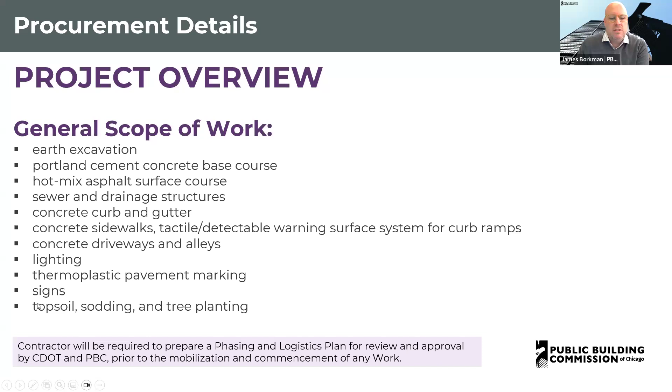The contractors are required for this project to prepare a phasing and logistics plan for review and approval by CDOT and PBC prior to the mobilization and commencement of any of the work here.

We also have some time of completion requirements that are included in the instructions to bidders. Those requirements will be highlighted here briefly, and after that I'll turn it over to Randy or Robert if they want to go into more detail. Right now, the substantial completion date is September 30th, 2025, with the following scheduled milestones.

First is mobilization - that's pre-construction, permitting, submittals of materials and equipment. Work cannot commence sooner than December 10th of this year, and must wrap up by March 31st of 2025.

Schedule 2 is the substantial completion, which involves the actual street reconstruction and all associated work. That work is not to commence sooner than April 1st, 2025, and must be completed by the substantial completion date of September 30th, 2025. Scheduled milestone number 2 is the tree planting - the fall tree planting schedule, starting no sooner than October 1st, 2025, and wrapping up by November 30th of 2025.

Liquidated damages for this project are $1,000 per day to achieve substantial completion, and $500 per day for each scheduled milestone date. Randy or Robert, anything you'd like to add here for time of completion requirements?

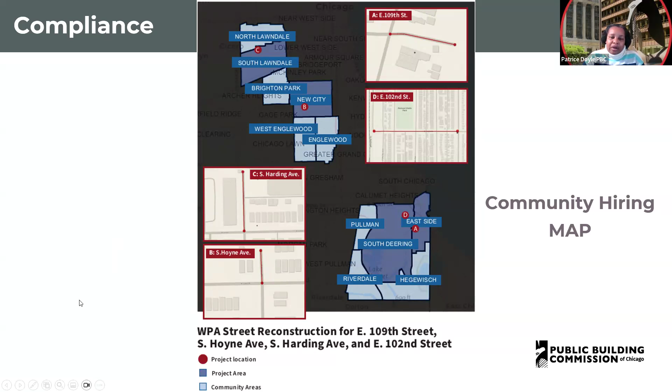B2G is our MBE/WBE tracking system that we use to monitor payments for MBEs and WBEs. Your MBE and WBE credit, if they are an established business meaning they are in the process of graduating from the program, their certification will identify what percentage they are at.

First year is 75%, second year is 50%, and third year is 25%. After that, hopefully they'll graduate from the program. So make sure when you identify an established MBE or WBE firm, that's the amount of credit they will receive, not their contract amount, but the credit amount for MBE/WBE participation.

Manufacturers that are MBE and WBE firms receive 100% credit. Suppliers receive 60%, and brokers receive 0%.

So if you have an MBE that's an established business with a contract value of 100,000, and they're in their first year, only 75,000 should appear in the credit amount on the Schedule D. Again, this is to be completed by the company bidding on the project.

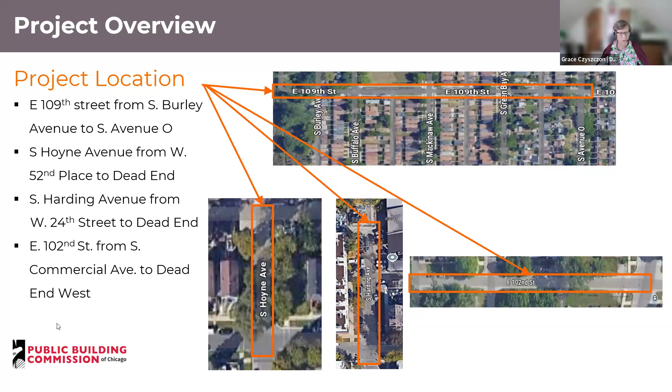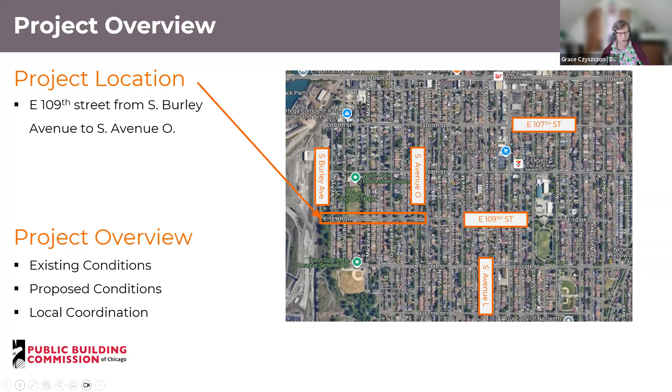East 109th Street from South Burley Avenue to South Avenue O. We'll discuss existing condition, proposed conditions, and some local coordination.

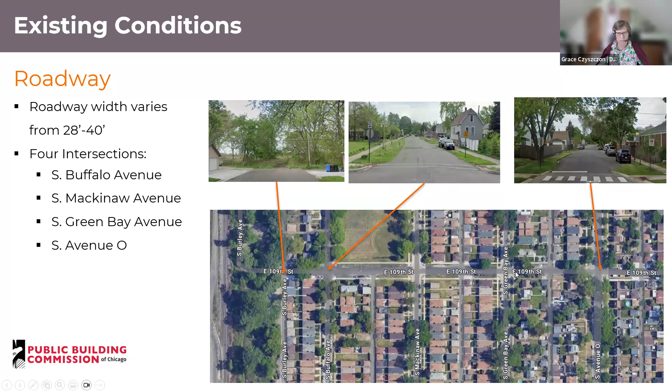Existing condition: existing roadway pavement width varies from 28 to 40 feet. This project includes 4 intersections: South Buffalo Avenue, South Mackinaw Avenue, South Green Bay Avenue, and South Avenue O. In the pictures above, there are some locations of pictures of those intersections.

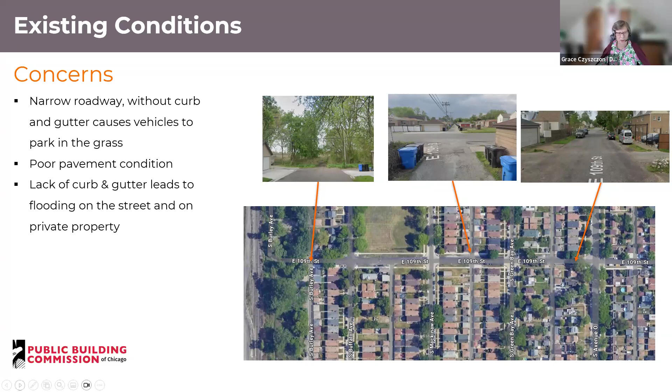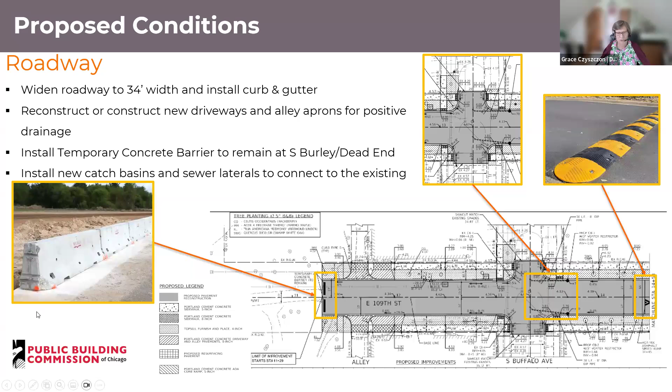Proposed conditions. We are proposing to widen the roadway to 34 feet width and install curb and gutter. Reconstruct and construct new driveways and alley aprons for positive drainage. Install temporary concrete barrier to remain at South Burley Avenue, which becomes a dead end. Install new catch basins and sewer laterals to connect to the existing sewer main.

This project includes one intersection to be resurfaced. That's South Avenue O and East 109th Street.

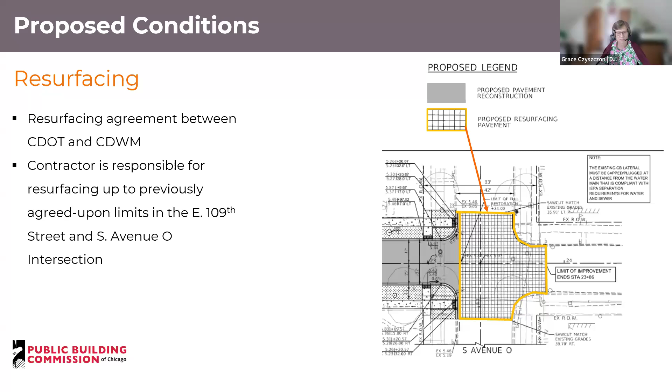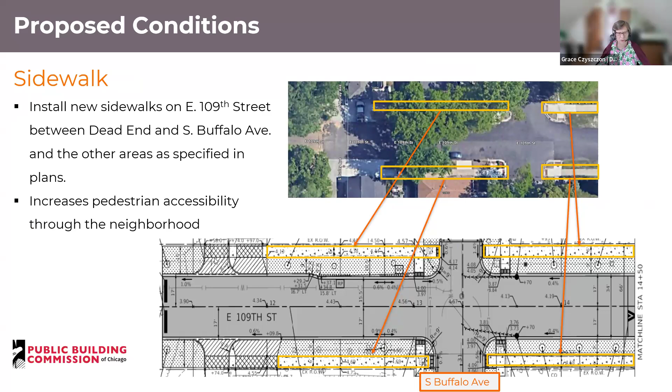Proposed conditions continued. Sidewalk. Proposed sidewalk is going to be installed from Dead End to South Buffalo Avenue, which will increase pedestrian accessibility throughout the neighborhood.

Next slide shows continuation of installation of a new sidewalk on both sides of the road, and that is from South Buffalo to South Mackinaw. Again, it increases pedestrian accessibility throughout the neighborhood.

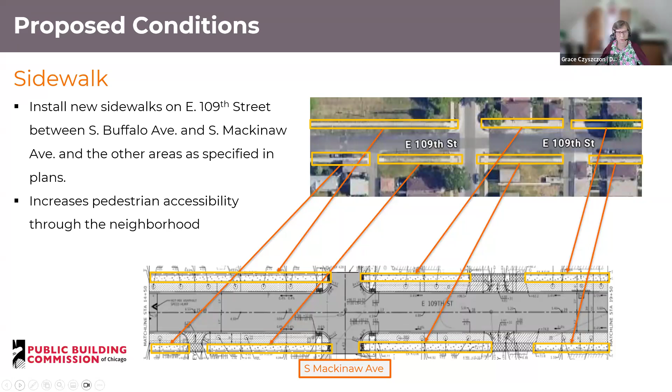Next slide shows continuation of installation of new sidewalks, which does provide ADA accessibility throughout the neighborhood.

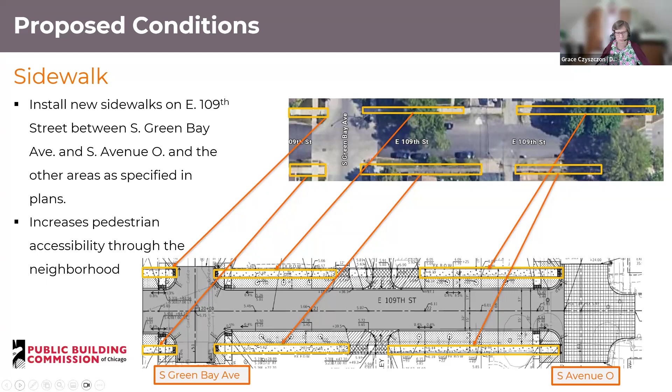Next slide shows that along with the roadway improvement, new trees will be installed. A total of 40 new trees will be planted between sidewalks and roadway, which is a common place for trees. New grass sod will be placed. Also, a few trees will be removed as shown on the plans per forestry survey and recommendation.

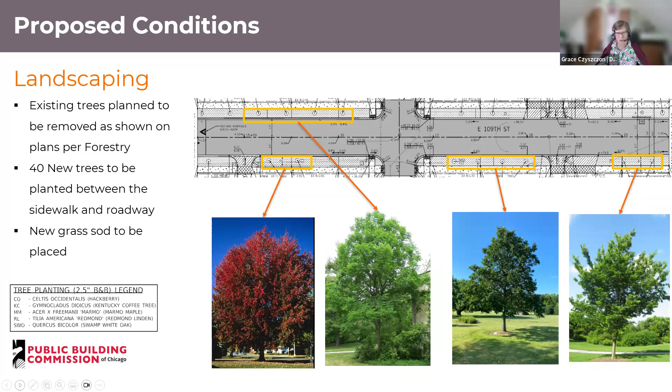Parking coordination: we are proposing to maintain existing parallel parking on 109th Street on both sides. Installing curb and gutter definitely defines where parking should end, not in the parkway area.

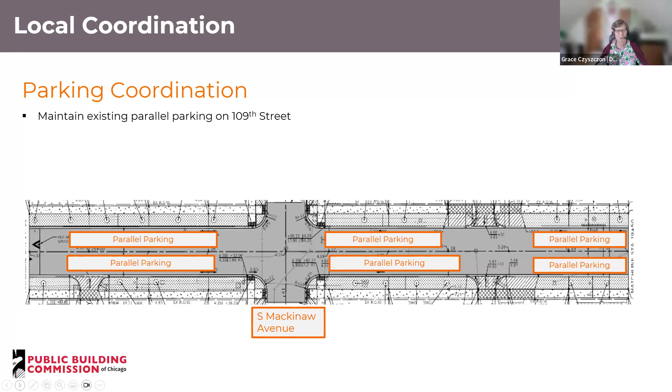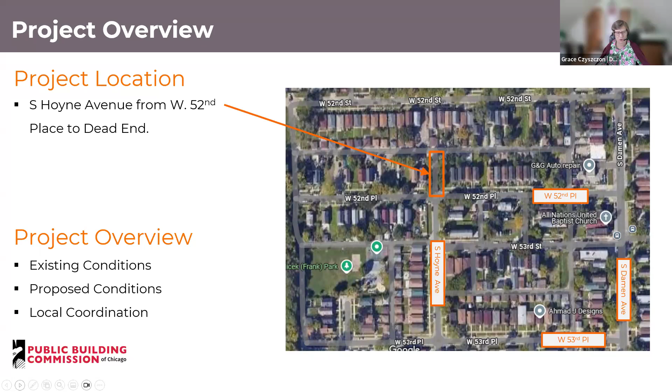Next location is South Hoyne Avenue from 52nd Place to Dead End. Again, we will be talking about existing condition and proposed conditions. Existing roadway width varies from 18 to 29 feet.

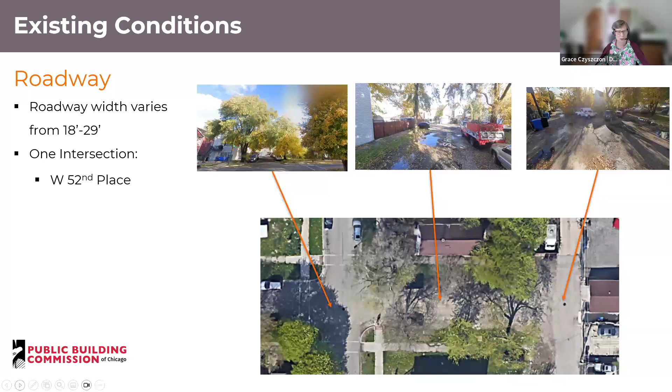This location is a short location, includes the 52nd Place intersection with South Hoyne Avenue. And pictures on the top are showing ponding, standing water, and poor pavement conditions.

Proposed conditions: we propose to widen the roadway to 30 feet wide and install new curb and gutter, reconstruct the driveway and apron of an alley, install new catch basins.

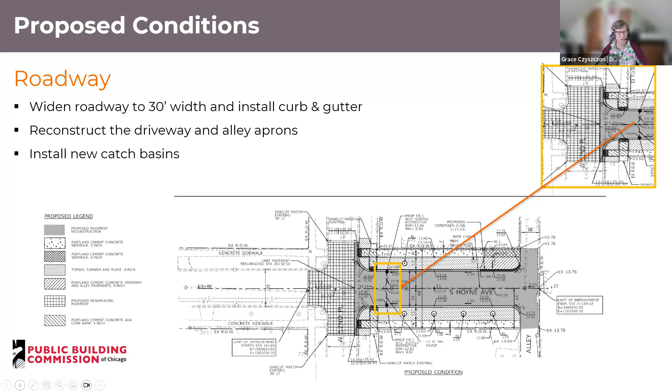This project includes one intersection to be resurfaced, which is 52nd Place and South Hoyne Avenue.

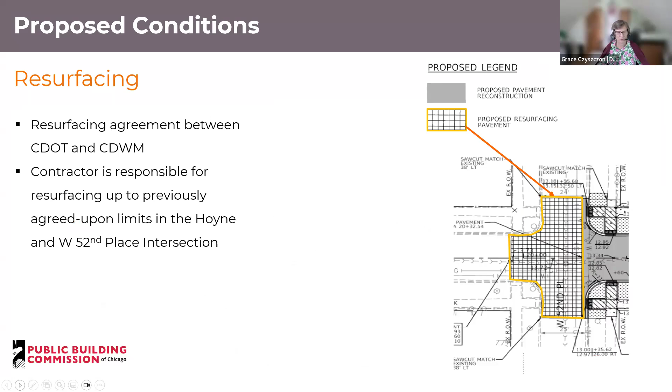New sidewalks will be installed on both sides of the roadway near the right-of-way, and new sidewalks will increase accessibility to the neighborhood and around. We will reconstruct pedestrian ramps at the intersection to meet ADA standards, place detectable warning tiles at each ADA ramp, and add new crosswalk pavement markings.

This project will also have new trees planted. There will be 5 of them, as shown on the plans and highlighted in this slide. New grass sod will be placed.

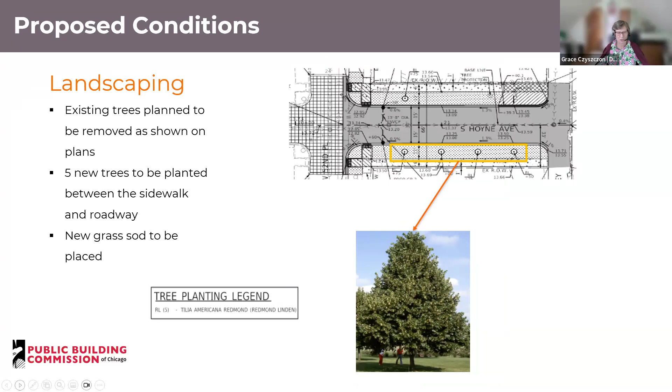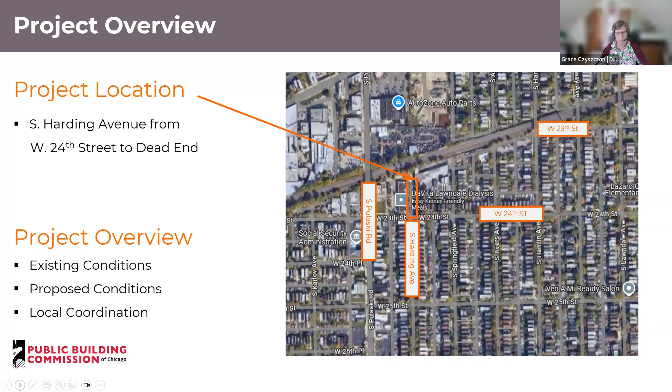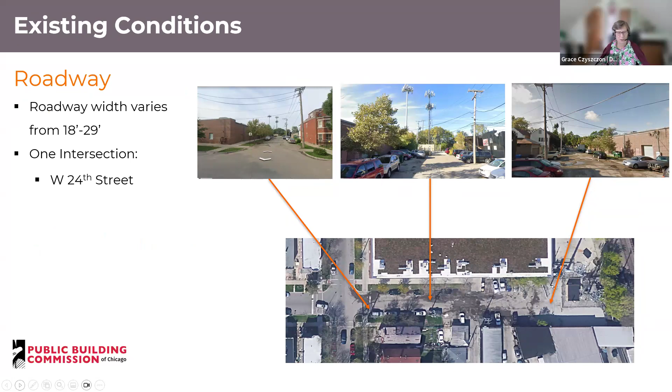Next location is South Harding Avenue from West 24th Street to Dead End. We'll talk about existing conditions and proposed conditions in the next slides. Existing roadway width varies from 18 to 29 feet. This project has one intersection, that is West 24th Street and South Harding Avenue.

Concerns: narrow roadway causes vehicles to park in the grass, as shown in the picture to the left. Poor pavement conditions, shown in the picture to the right. Lack of curb and gutter leads to flooding on the street and on an adjacent private property.

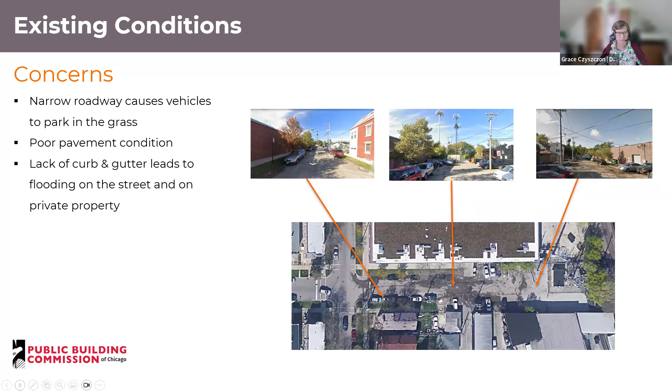Proposed conditions. This design proposes to widen the roadway to 32 feet and install new curb and gutter, reconstruct existing driveways and alley apron, and install new catch basin and sewer lateral to connect to the existing sewer main line.

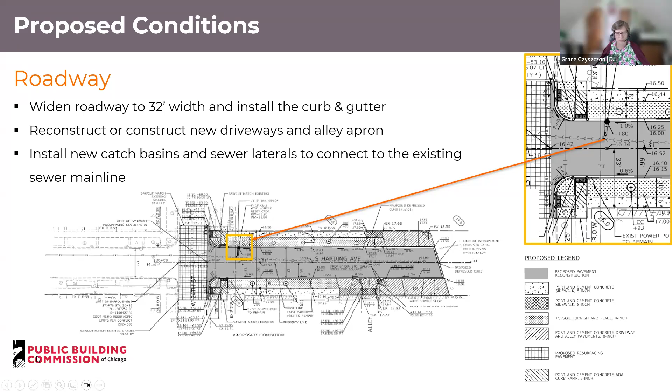This project also has one intersection to be resurfaced. That's West 24th Street and South Harding Avenue.

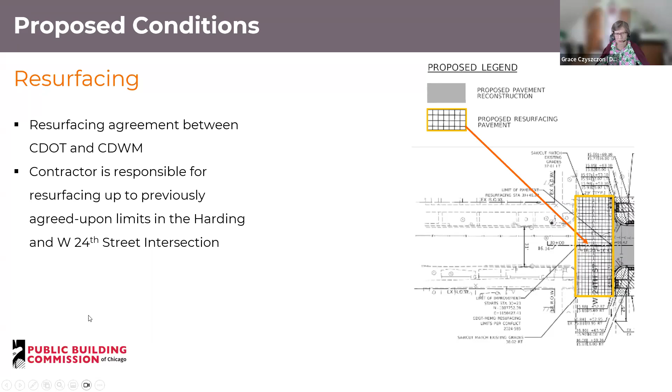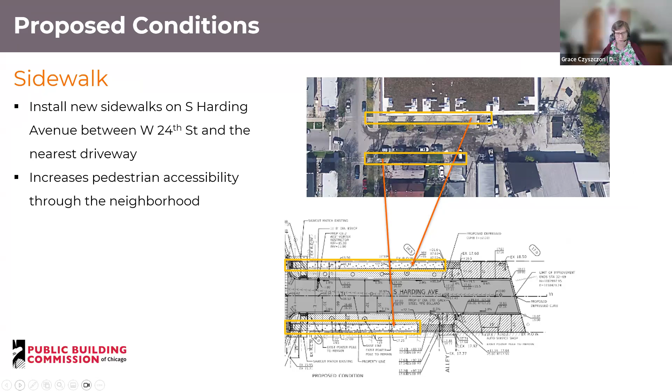Sidewalk will be installed on both sides of the roadway to the nearest driveway. This will increase pedestrian accessibility throughout the project and neighborhood.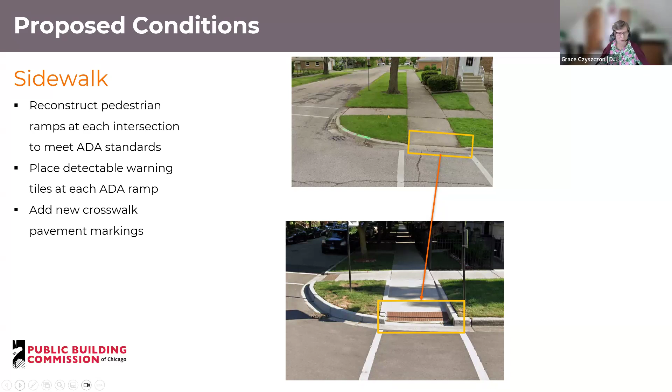It will need to reconstruct pedestrian ramps at each intersection to meet ADA standards, place detectable warning devices, tiles, and add new crosswalk pavement markings.

This project, as all above, is planning to have new trees planted. There will be 3 new trees installed. Grass, sod will be placed in the parkway.

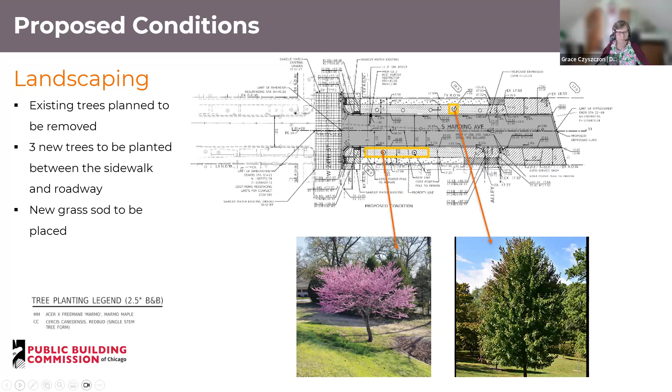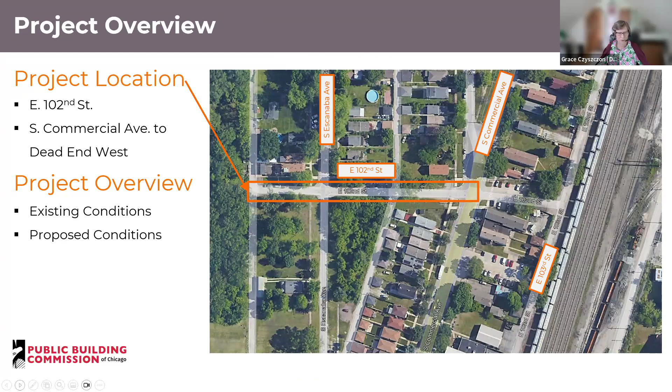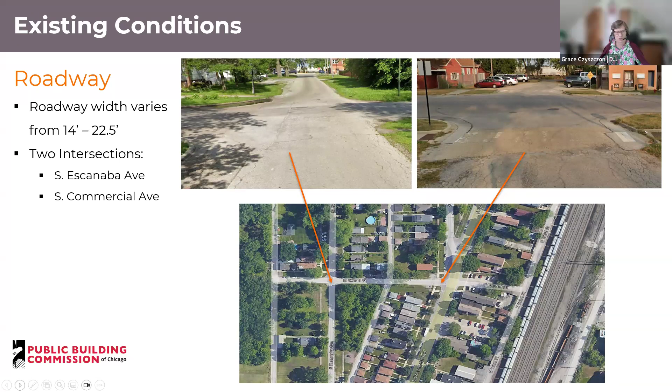Fourth project location, that is East 102nd Street from South Commercial Avenue to Dead End West. We'll be talking in next and showing in next slides existing conditions and proposed conditions. Existing conditions: roadway width varies from 14 feet to 22.5 feet. This project includes 2 intersections, South Escanaba Avenue and South Commercial Avenue.

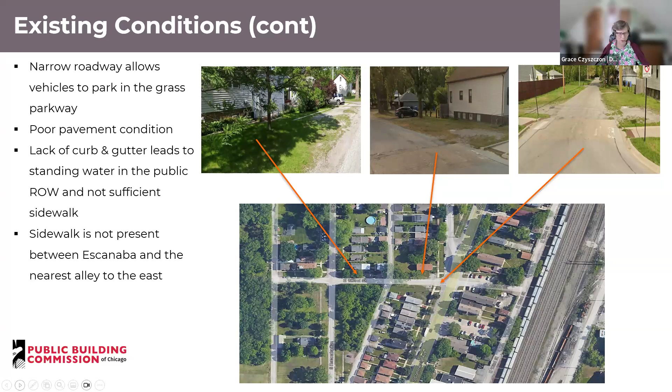Existing conditions: narrow roadway allows vehicles to park in the grass parkway, as shown in the middle picture. Poor pavement condition is also shown in the pictures. Lack of curb and gutter leads to standing water in the public right-of-way and not sufficient sidewalk. Sidewalk is not present between Escanaba and the nearest alley to the east.

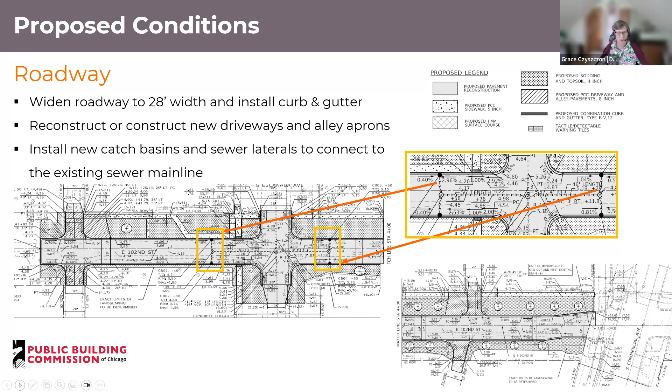Proposed conditions: widen roadway to 28 feet wide and install curb and gutter. Reconstruct or construct new driveways and alley aprons. Install new catch basins and sewer laterals to connect to the existing sewer main line.

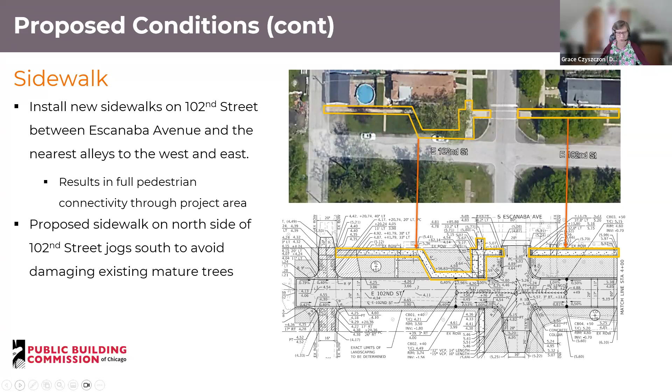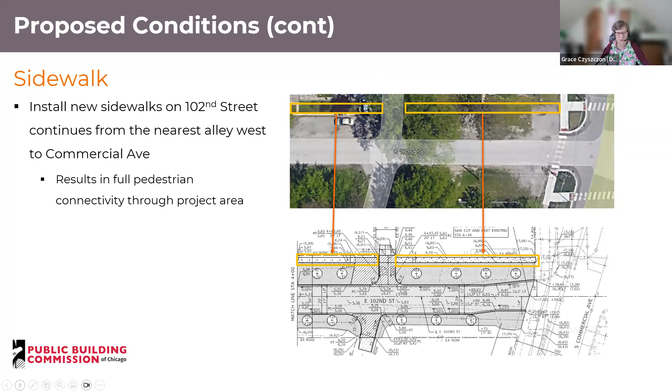Sidewalk: install new sidewalks on 102nd Street between Escanaba Avenue and the nearest alley to the west and east. That will result in full pedestrian connectivity through the project area. A proposed sidewalk on the north side of 102nd Street jogs south to avoid damaging existing mature trees, as directed by the Bureau of Forestry. Install new sidewalk on 102nd Street continuing from the nearest alley west to Commercial Avenue, resulting in full pedestrian connectivity throughout the project area.

Reconstruct pedestrian ramps at each intersection to meet ADA standards. Place detectable warning tiles at each ADA ramp. Add new crosswalk pavement markings. Install new sidewalks at alley crossings.

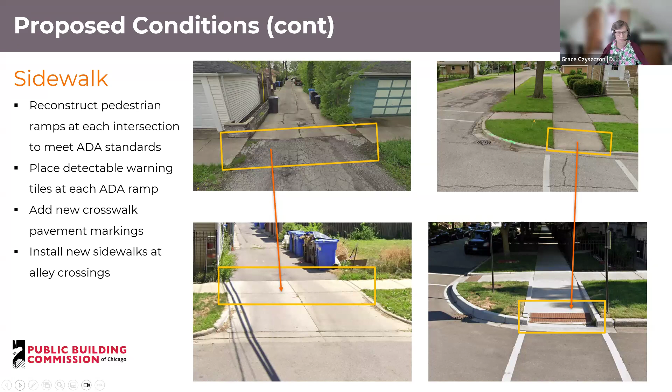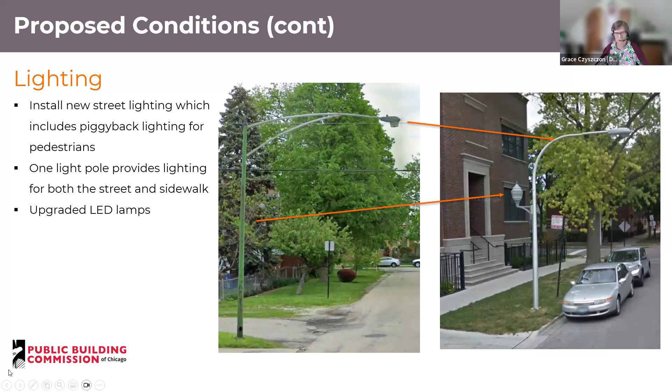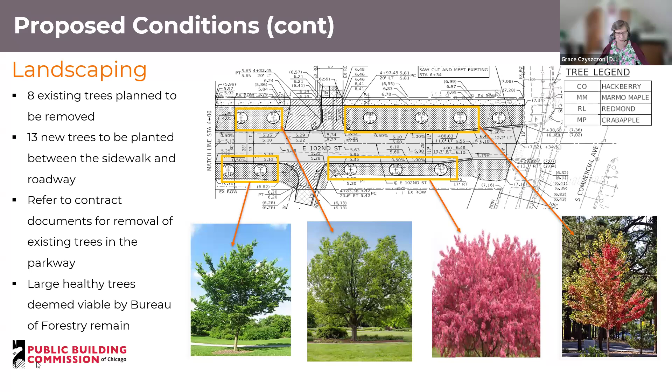So this will be the last slide, but I wanted to show it colorful. I think that it leads nicely to questions. Does anyone on the call have any questions? Or Robert or Randy, would you like to add anything?

Go ahead, James. I was just wondering, is this a mandatory pre-bid? No, this is not a mandatory pre-bid conference. Thank you. You're welcome. Go ahead, Randy.

No, I just wanted to say good job, Grace. Excellent job in explaining all of the concerns and the design on the project. Good job in going through each section in very good detail. So good job.

Yeah, Grace, just to add on to what Randy indicated, I thought the presentation definitely provided some graphics and pictures that clearly explain the scope of the work indicated earlier in the presentation by James. So it's a great preview of what is in the contract or bid documents. This is also a preview, especially those beautiful trees, of how this project will look once constructed. We expect the lowest responsible bidder to carry out those photos.